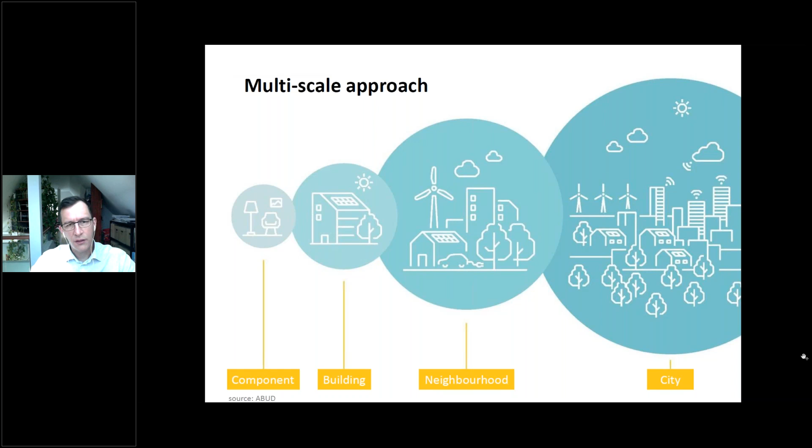Next slide, please. As architects, it's very important to understand that our actions are influencing all scales on the Earth. If we are working with buildings, of course, that will interact with the cities, but the smaller ones, the buildings or even the building components, are an important scale for us as architects. And today, next slide, please, we will focus much more on a very special and, for many architects, the most important issue: how our buildings look.

Talking about the whole envelope, I would like to concentrate mostly on one special issue, the thermal insulation and thermal transmittance of a specific facade. And I would like to address one very important issue, next slide, please, which is mostly the problem of overheating of our buildings. You know very well that in Europe we have regulations, the EPBD, related to the thermal performance of buildings. And of course, we have different specialized regulations regarding the building envelope.

Next slide, please. In general, we have addressed this issue for many decades, and we think that if we insulate our buildings more, then the result is increasing energy efficiency. However, I would like to share one case study with you where we studied how to optimize the building envelope. The next slide, please.

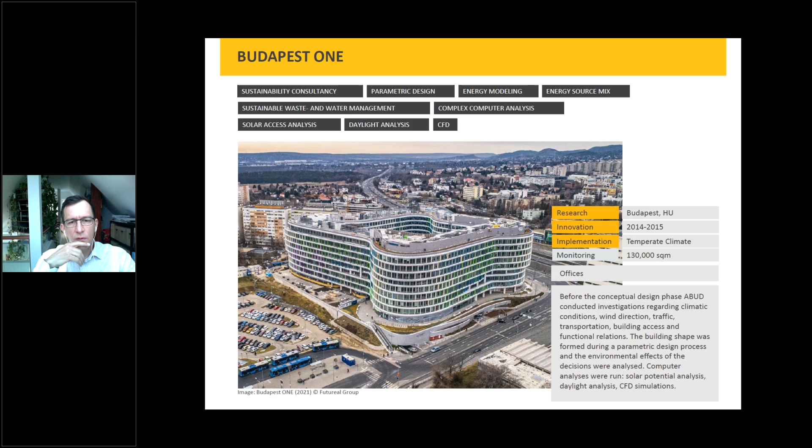Next slide. Of course we did a lot of simulations and modeling work to optimize the whole building envelope, the shape and everything around the building. We even did several CFD simulations to study the microclimate around the building. And because of those complex simulation works, next slide, please.

Because of those complex simulation and optimization work, we could decrease the primary energy demand of the buildings. However, looking more into detail, we see that the primary energy distribution is very much cooling related. So in office buildings, in climates like Budapest, it's actually a cooling related issue, and you can see that heating is more or less not so important.

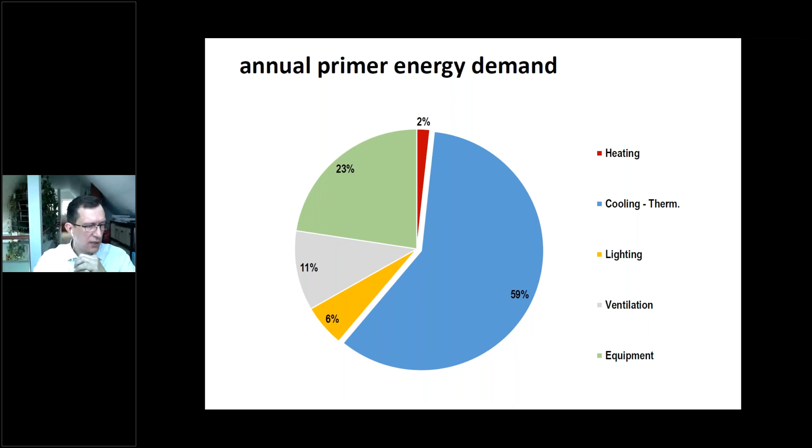We did several optimization processes, looking into climate change scenarios but also how the EPBD is going to become stronger and stronger, meaning you will insulate buildings more according to regulations. You see that this actually counteracts energy efficiency, because comparing a less insulated building with a much more insulated one, and also looking into climate change scenarios where boundary conditions will change and the microclimate will simply become hotter, you will have a much higher energy demand in the building.

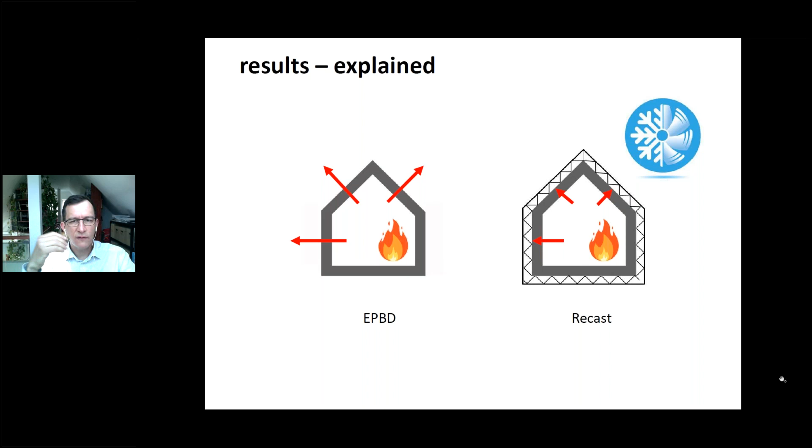Just to explain this: think about a normal conventional building envelope where we put more insulation on the building, and we put internal gains into the building. It will be much more complex for the heat to go out through the building envelope. And what will you need in this case? Of course, a kind of artificial system to cool down your building, which will result in a much higher energy demand in the building.

So I have to say that in many cases, especially in southern countries or in climates like Hungary, a continental climate, it's not only the U-value that counts. So we have to rethink very much, for example, the EPBD regulation. It's not really the recast we are aiming for, it's much more a rethink.

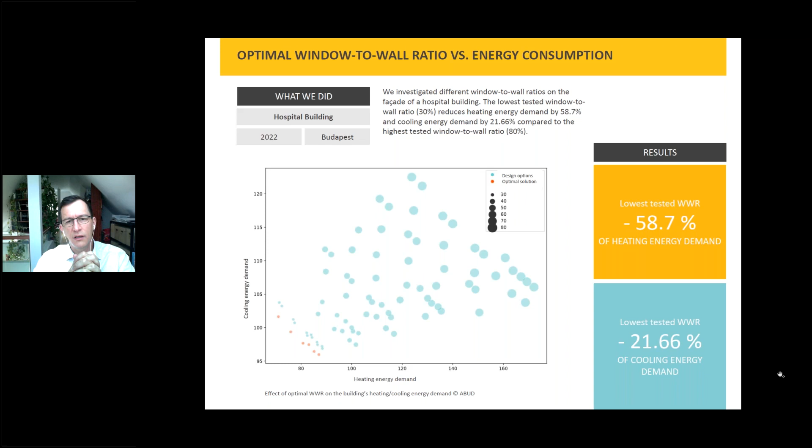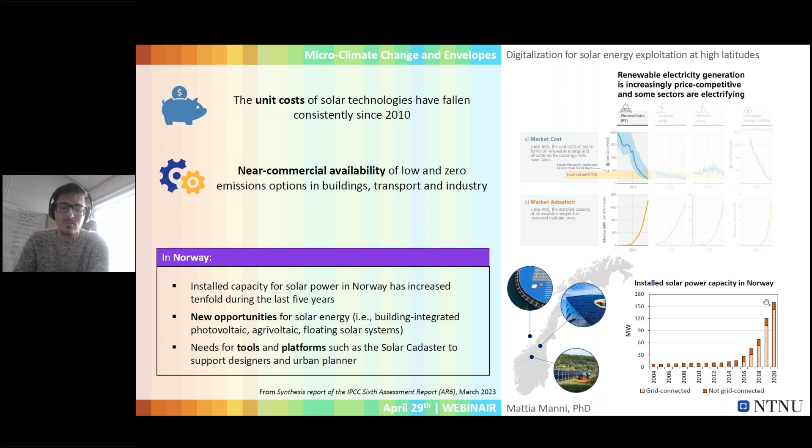Therefore, there is a need for tools and platforms that can provide support to designers and urban planners.

And here comes the sun, Helios, in this case. Helios is the project I'm working on. It's a project that aims at developing a solar cadastre for citizens, for the community. A solar cadastre is a 3D solar map that can be accessed by citizens to optimally exploit the solar energy potential of their buildings.

This project is built on 4 pillars. Pillar 1 and Pillar 2 concern the input parameters of the solar cadastre, which are the solar data sources and the geometry volume.

Activities within pillar 1 are focusing on the investigation of solar data sources, both numerical reanalysis and satellite observation, but also ground measurements. We established a ground monitoring network at the university campus, equipped with several pyranometers installed with different orientation and tilt angles. There is also a sun tracker that can provide measured quantities of direct and diffuse irradiance, which is not so common everywhere.

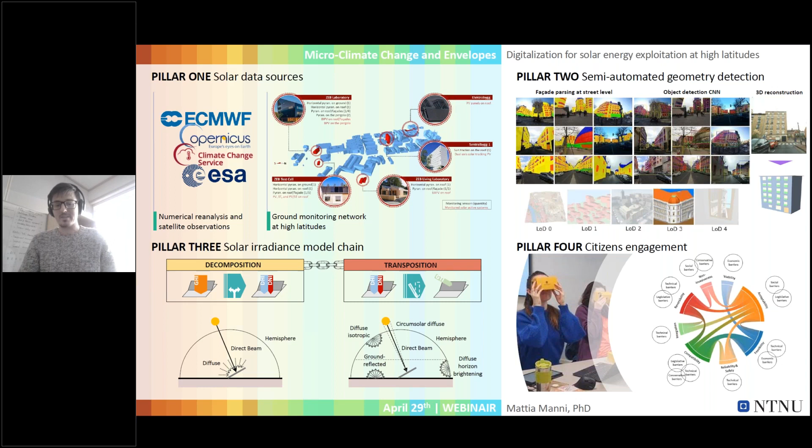This is a case that happens quite often here, and of course we get some loss in the energy production because of the snow accumulating on top of PVs.

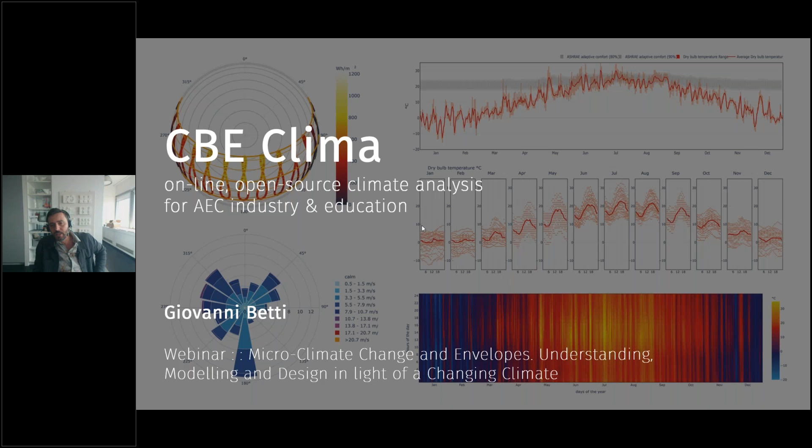Perfect, so hi everybody, my name is Giovanni Betti. I'm going to be talking quickly about a project that I've been working on for the past couple of years and still under development, called CBE Clima.

Just before that, a couple of words about me. I'm an architect, I am currently head of sustainability at Henn Architects in Berlin, and I'm also a guest professor for digital and experimental design at the University of the Arts here in Berlin.

A bit more about me: I started my career at Foster Partners, where I was in a team called Specialist Modelling Group for about 8 years, where I was associate partner. Then in practice here at Henn for about 5 years, leading a team called Performance-Based Design. Then a short 2 years in academia at UC Berkeley as assistant professor for architectural design for building performance. And now I'm splitting my time between practice at Henn, trying to set up and lead a sustainability department, pushing our buildings to be carbon neutral, and also at the University of the Arts here in Berlin.

The work that I'm presenting here is work that I started at Berkeley and continues - it's CBE Clima, an online open source climate analysis tool for the AEC industry, for the architecture, engineering and construction industry, but also for education in these fields.

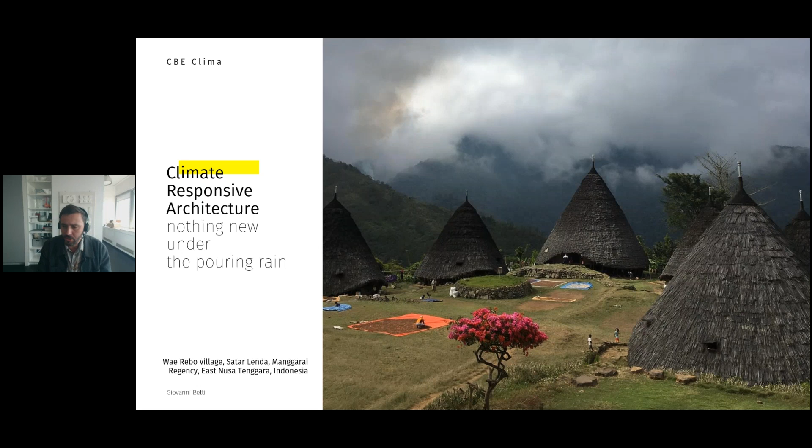And this starts from a basic consideration: climate responsive architecture is nothing new. We have a lot of very beautiful vernacular historic examples, from the wind towers of Yazd, to villages very well adapted to the wet and humid conditions in Indonesia, to beautiful city planning examples in North Africa.

And climate responsive architecture in the face of the climate crisis is arguably always more important. While climate responsive architecture is nothing new, climate analysis is actually a modern invention - probably modern with a capital M, in the sense that it relates really to the modern movement and to this sort of breaking point with tradition that came with industrialization and the modern movement.

So at the turn of the 20th century and after the war, there's really been a shift in how architects would deal with climate, treating it as a specialist subject. This led to developments in creating the science of microclimatology - how topography affects microclimate. There are a lot of beautiful, fascinating graphics that describe these actually quite intangible aspects and how they interact with the built environment.

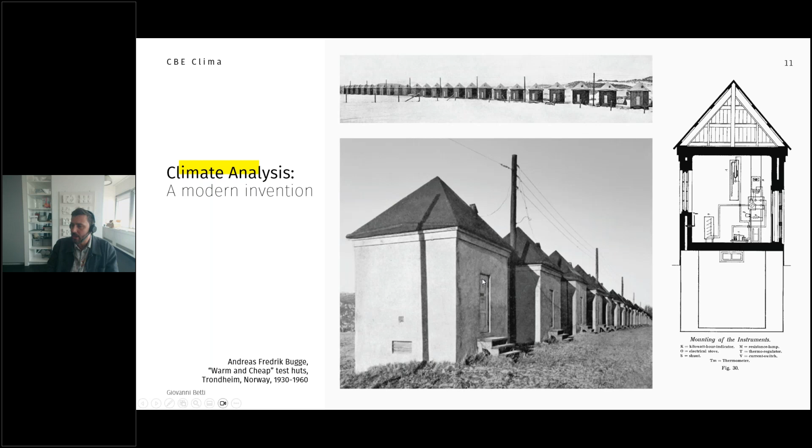I always find fascinating these Warm and Cheap test huts by Fredrik Bugge in Norway, trying to understand how different constructions respond to climate. And this is probably the first time modern climate analysis appears - in this American Institute of Architects regional bulletin in the 1950s, where they start publishing statistics of climate and how these could impact architectural design.

This brings us to our current situation, where unfortunately this activity, so fundamental to design, has become somehow a niche and time-consuming task. There are specialized programs that need to be downloaded - here Climate Consultant, which has a long history, or the state of the art which is also a chain of tools, so with Grasshopper, Ladybug, or Climate Studio, or whatever - but it's essentially a software within a software, so it gets quite specialized and technical and requires quite a lot of knowledge.

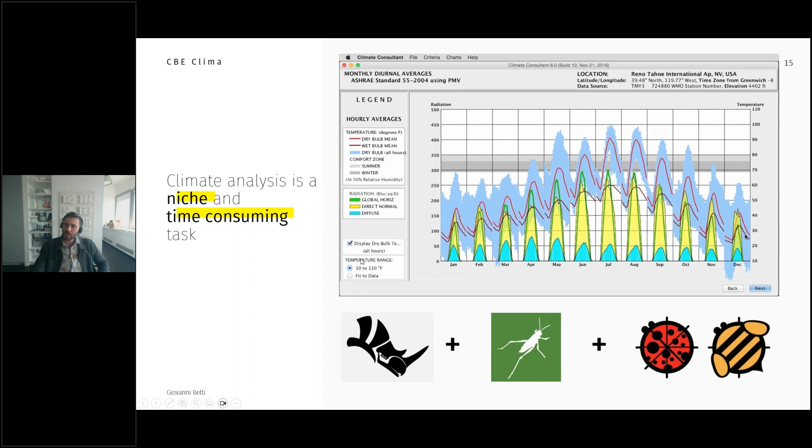And that was, for instance, also kind of the way I was doing this professionally in my work, building over time this monster definition, adding graphs and adding specs, and this was actually working relatively nicely. That monster definition that you saw there would then spit out a 40+ page climate report with all the graphics. But again, the problem is specialization, for something that should be such a basic activity.

So that's where Clima tool comes into place, and the goal in creating Clima tool was to create a tool that was easy to access, easy to use, easy to understand, and flexible. For those of you that are interested, it's mostly in Python, and we use pythermalcomfort as one of the main libraries specific to the psychrometrics, and PVlib, and we use Plotly for creating all the graphs.

And this, again, easy to use, easy to access. The code is under MIT license, which means you can take it and remix it and reuse it and do whatever you want with it. And all the graphics are under Creative Commons. Use them for any purpose, educational, research, and or professional.

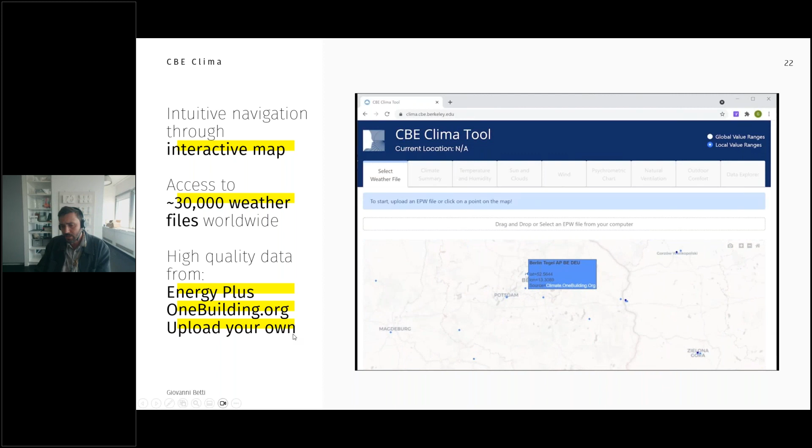Clima works like this, and maybe I'll switch. Let's see if I can switch to a live demo. Maybe somebody can make some noise that you see now a web browser.

But essentially it works quite simply as a series of tabs that you move from left to right. You start with a world map where you can zoom in and select the weather file you want. So now I'm in Berlin, so I'm gonna pick one in Berlin. And then essentially you move through the tabs left to right, but you can also jump in between. So we start with a climate summary where we give you back a map, so you're sure you picked the right place, and some basic statistics.

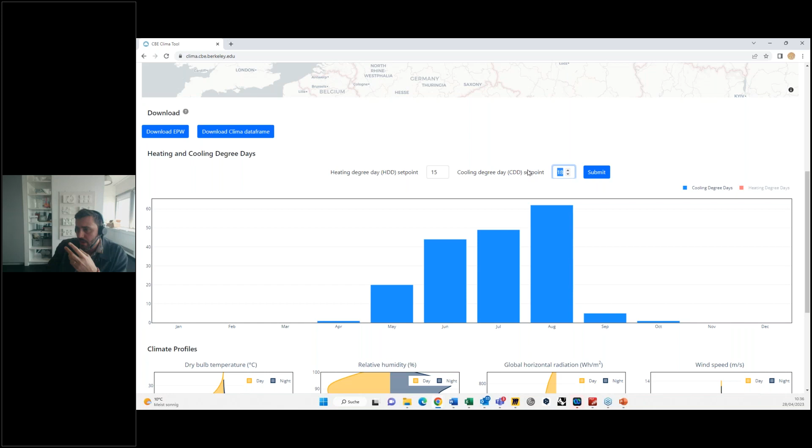You can download the EPW and you can download the climate data frame. We calculate a lot of other values on top of the EPW. And then you have basic stats like heating and cooling degree days as a basic starting point for the climate. And one thing that we wanted to do is that all of those graphs are highly interactive. So you have nice mouse over events, you can select, you can see only the heating degree days or only the cooling degree days. You can say, well, actually, I'm interested in 15 degrees as a base, not 10 and 18. And the graphs interact.

And then going into further levels of detail, temperature and humidity as the main variables, a yearly chart showing minimum and maximum overlaid with the adaptive comfort, monthly averages, and heat map charts. And again, everything is extremely interactive. So if you are interested only in certain months, you can zoom in there, and everything is downloadable as a vector graphic. You just click on this and you have it immediately as SVG, which means that you can put it in Illustrator if you want to process it, or just in your PowerPoint presentation, it can be printed at any resolution, can be edited, can be changed.

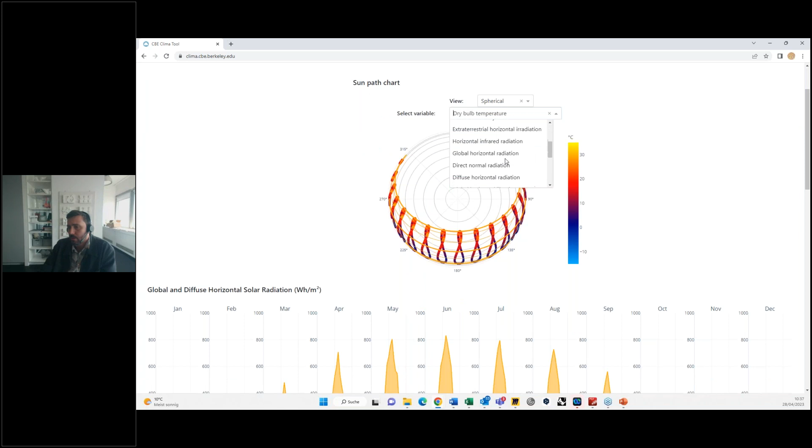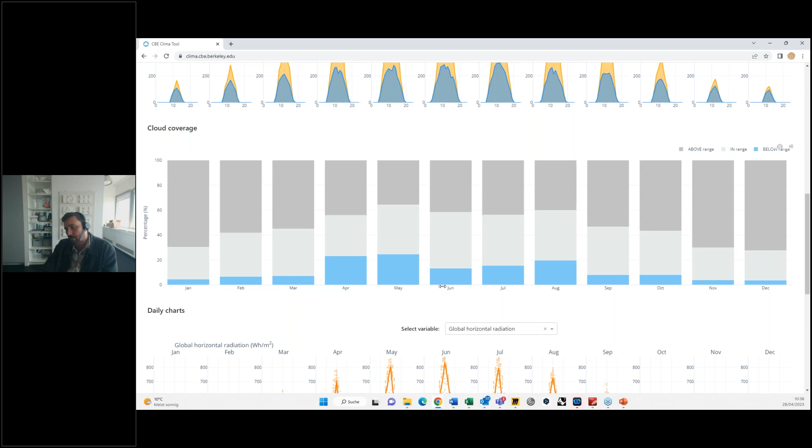And then again, increasing level of complexity, sun path. So we create the sun path. That's not in the EPW, but we have the information. You can overlay all the other variables that you have available, so dry bulb temperature, or if you want to know what is the radiation in relation to the sun path, or if you prefer a Cartesian to a spherical plot, you can do that as well. You can have diffuse and global horizontal solar radiation throughout the month as a plot throughout the day. A breakdown of how often it is cloudy, intermediate, or sunny sky in Berlin.

So with all this emphasis on climate, I clearly chose the wrong place to live, but that's another conversation.

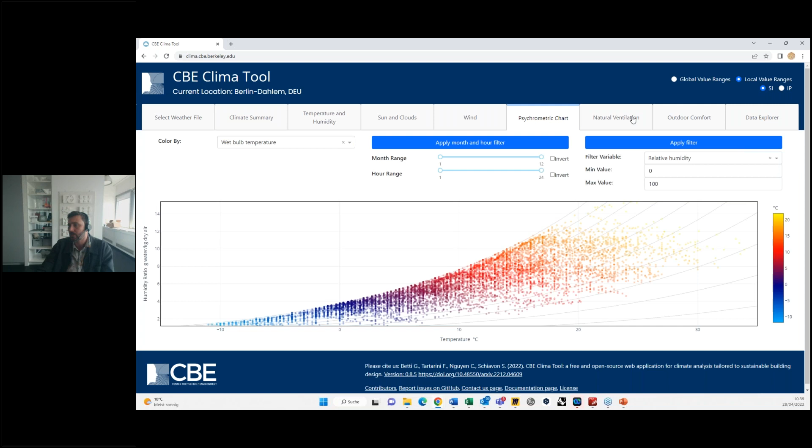And again, being able to drill down and moving forward, we can go look at, for instance, wind, where we provide you with wind roses. Here, for instance, if you're interested only in seeing the strongest winds, you can select only those and see what the wind rose is there. So this kind of idea of interactivity. And it keeps on going. It gets progressively more technical, if you wish, so a psychrometric chart where I can look at the frequency or I can plot data on top of that. We're also trying to get closer to design.

Am I running over time? Yeah. Okay. That's it. So I'll let you... Sorry. No, it's fine.

And I will just say, we do also a number of things.

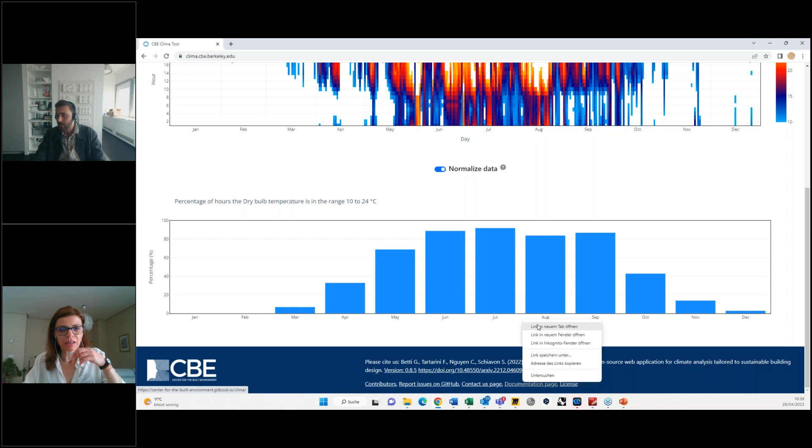So the only thing that I can say, we also offer here at the bottom of the page, you have a very rich documentation that explains everything that happens in the website in rich detail. So I will leave it to that, and we can talk more in the Q&A.

Discussion session. Okay. Thank you. Thank you very much, Giovanni. So we now leave the floor to Umberto Berardi, that is now with us. Hi, Umberto. Can you hear me? Good morning, Umberto. You have 8 minutes. The floor is yours. Yeah, I will be super fast. Don't worry. I was actually connected, but I was on a wrong link, whatever. Should I share my screen or do you share my screen? No, I'll share it for you. I'm going to give you the controls. One moment. It's okay.

So I selected a topic that is a bit bigger than the envelope, because what I want to describe is what we've been doing over the last few years in Toronto, Canada, where we've been creating an urban building energy model that really helped us to challenge the multiple changes that this city is experiencing. So next slide, because unfortunately you're sharing a PDF, but I'm more than happy to share the PowerPoint later on.

In brief, what is happening in the city of Toronto is that it used to be very low-rise construction, a very low-rise building typology, but on the river there are now basically 100 buildings with a height above 100 meters. So all this area in green has been subject over the last 15 years to significant development with a lot of new challenges.

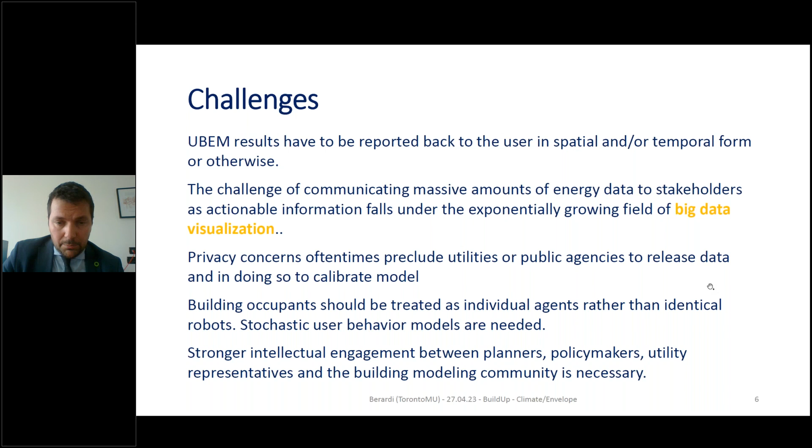Next slide. What we've been doing with these maps? Mainly trying to direct the planning of the city, making sure that we know what energy infrastructure needs to be put in place, and trying to promote a deeper penetration of renewable energy technology opportunities within the city. There are still some concerns with privacy and with the amount of data we are dealing with. The data clearly is a big part, but also the visualization and the capability to take advantage of the availability of data. More recently, we've been taking this map to look at resilience and climate change impacts on the city. If you go to the next slide, please.

What you're going to see is a snapshot of a very powerful tool that Canada has made available for all researchers, called Climate Data for a Resilient Canada. This is a web page of the Ministry of Environment of Canada. So this is basically a high resolution, detailed IPCC for Canada, with all the scenarios and the impacts that different measures are going to have on climate data in 10, 20, 30, 50 years from now. If you go to the next slide, you can get a sense of what I mean. You can zoom in and get the energy demand month by month. And if you start zooming in, you have a resolution of 50 kilometers by 50 kilometers.

So it's quite a good granularity that Canada has made available for us. So next slide: with this data, we've been trying to couple this metadata with a bit of microscale data, to try to use WRF to get from this nationwide data to something that is more granular for the different neighborhoods of Toronto.

If we go to the next slide, the idea has been actually to look at the impact once we go to Toronto. And the impact is quite dramatic. If you use the ASHRAE characterization, Toronto used to be in zone 6. These days it's in zone 5, but it's already more or less moving towards zone 4.

So what is happening is that this continental climate is experiencing significant challenges over summer heat waves and summer heat demands. Just to give you a sense, last year Toronto had heating degree days that were only double the cooling degree days of the city of Toronto, which is actually astonishing if you think about that.

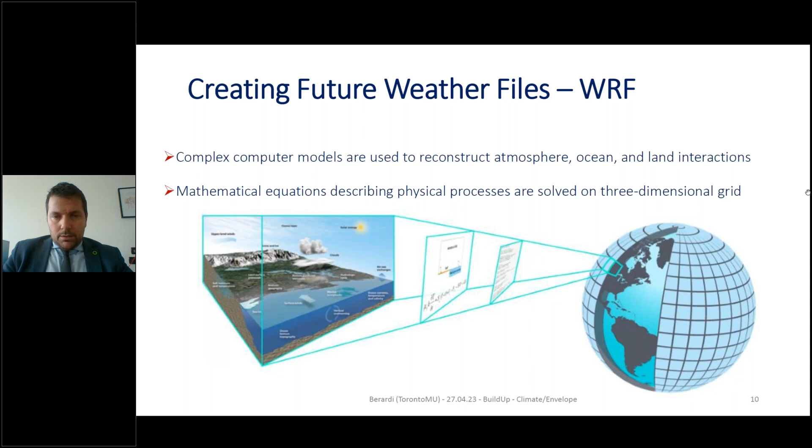So if you go to the next slide, clearly, if you go to our webpage, there is a significant number of studies that we've been doing with this kind of data. The idea has often been to compare different scenarios, to compare different options. Options in terms of intervention, in terms of penetration of renewables, in terms of decarbonization targets.

So with the availability of all these data, and more importantly, with these data applicable at the urban or microclimate scale, if you can get to the next slide, what we've been doing is a number of studies on the energy impacts of different things. So clearly, the availability of data creates the opportunity for doing a bit of planning. That needs to be automated with modeling that requires a bit more computing power, but that's available these days in most research centers. And with that, we can do different optimization targets.

So we go to the next slide, or even two slides from now, because basically I'm now just showing you a few pictures. So this is how the Toronto weather file will change. You can see the drop in the heating degree days from about 5,000, already in the range of 4,000, expected to drop significantly below 3,000. Next slide. So what we do is energy planning at the city scale. Here, for all the archetypes in the city, you see the energy demand shifting with different models to forecast the future weather.

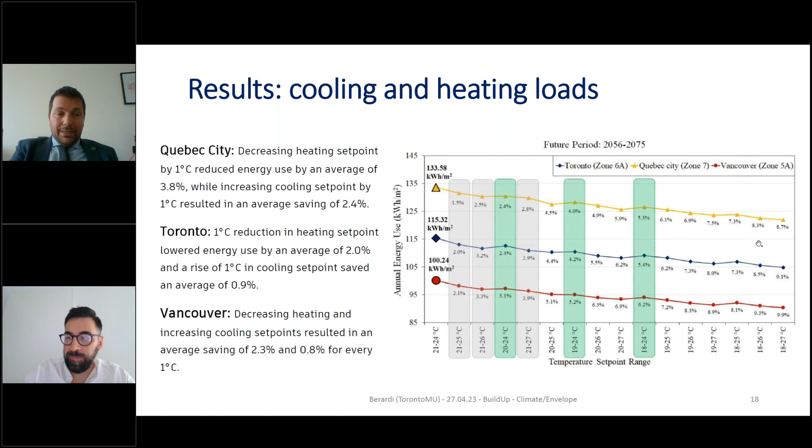So with that, I conclude. There are another couple of slides that simply look at an iteration of this approach, but I think the big picture is: cooling loads are clearly expected to increase, even in North America, heating degree days are significantly dropping, and being able to anticipate this trend when we do energy planning is really our key and, hopefully, valuable contribution to the community.

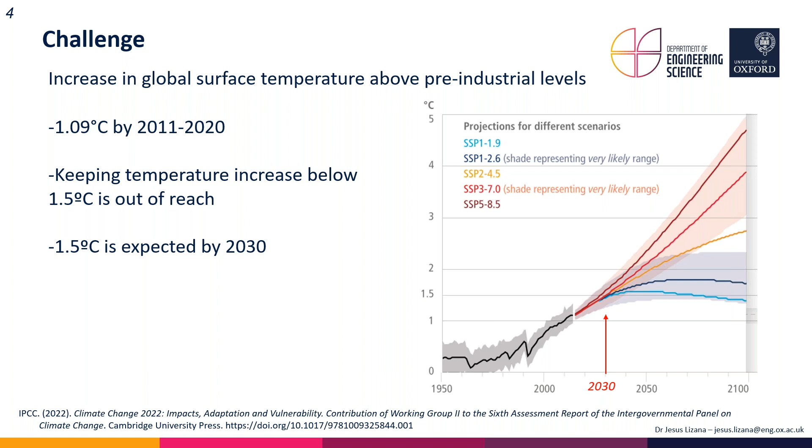This is really important, especially considering the last IPCC report, where we can see how the target of keeping the temperature increase below 1.5 degrees Celsius, agreed by the Paris Agreement, is out of reach. Climate change is here. In all possible pathways, we know that we are going above 1.5 in the next decade or sooner. So we need to somehow forget about the historical weather observations that we commonly use to support building design, and start designing buildings to be prepared for the coming climate hazards.

So this is the work that we are trying to create with citizens' data. We try to create more accurate climate information to support building design, in order to understand much better what the climate-related events are that our cities are going to face, and try to find the interrelationship between where we have higher exposure to these climate events in our cities and where we have the highest vulnerability, to support the creation of much better adaptation policies.

We are working with two main strategies. First one, working with citizen-driven distributed computing, and the second one with citizens' weather data. With the first one, what we try is to generate the highest spatio-temporal resolution climate modeling ever performed using the potential of the citizens' computer, in which we are able to share individual computational tasks into a large number of citizens' computers, in this case more than 30,000.

With this, we are able to get climate simulations globally of the different climate change scenarios at a very high resolution globally. However, one of the main problems of these global modelings is that they overlook the urban overheating. So the data to model the built environment at a very high resolution is quite challenging. So in order to understand much better the problem of the urban overheating, we are also looking at the citizens' weather data in order to get information at a very high resolution, how are the weather conditions inside the city.

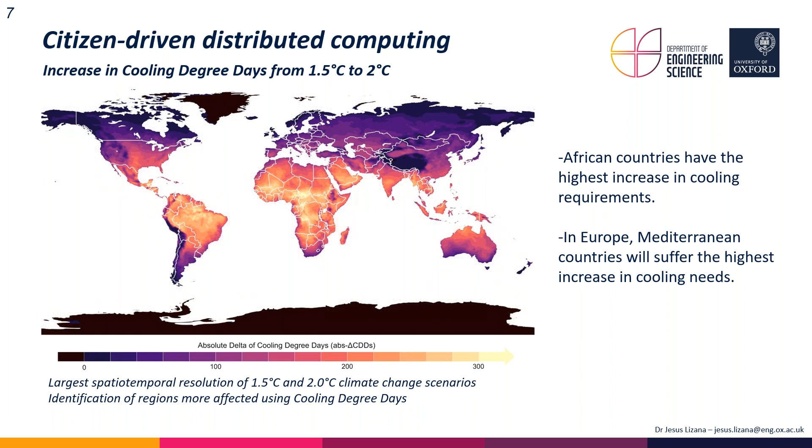Even in Europe, we can see how the countries that will suffer the highest increase in cooling needs are those located in the Mediterranean area, especially southern Spain, Italy, and even the coastal area from Greece to Croatia. So it's really important to start designing buildings, understanding the implication of climate change and how the weather conditions that our cities are going to face will change. However, as I said, one of the problems is that the increased heat exposure will be even higher in cities due to the problem of the urban overheating.

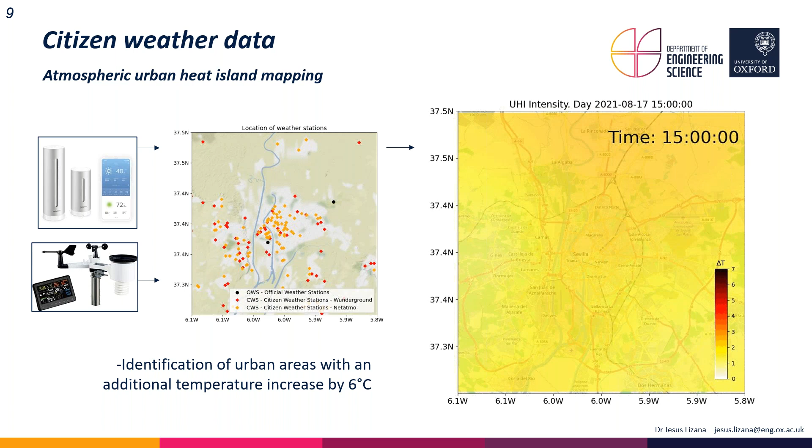So with this work, what we try to highlight is the important role of citizens' data to support the generation of accurate weather information globally at macro and meso scales, and at local and micro scales. The next steps that we would like to achieve in the following months are to disseminate, to close the different publications defining these approaches, to release the tools and the data generated in open access in order to support the decision-making process, in order to start designing and implementing better adaptation policies globally. This is the end of my presentation.

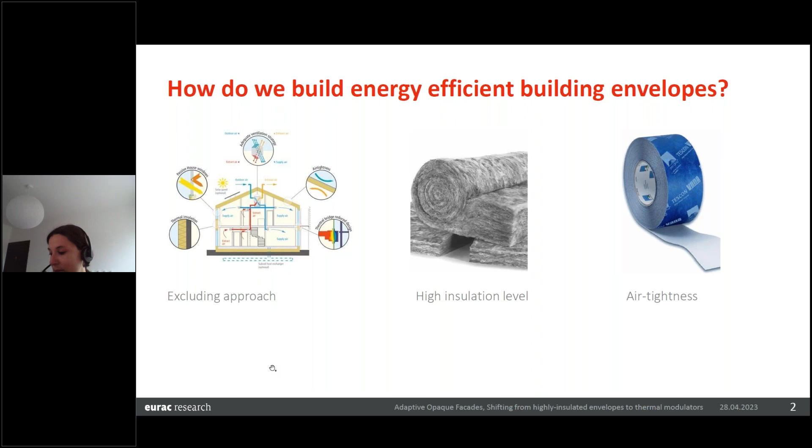This is something that Andreas has already presented in his first presentation, talking about how internal heat gains can create moments of overheating. This focus we've had just on the U value of our envelopes is also creating issues in certain climates, and we've been increasing the cooling energy need, even reducing heating demand, even in climates where historically this was not needed.

When proposing insulation levels, the norms consider average situations and specific weather files, which are a static picture, when neither the internal situations, internal heat gains, nor the climate are static. We're not just talking about what happens day to day or season to season, but as we know, the climate is changing, so the insulation levels we're putting in today might not be the best for future scenarios.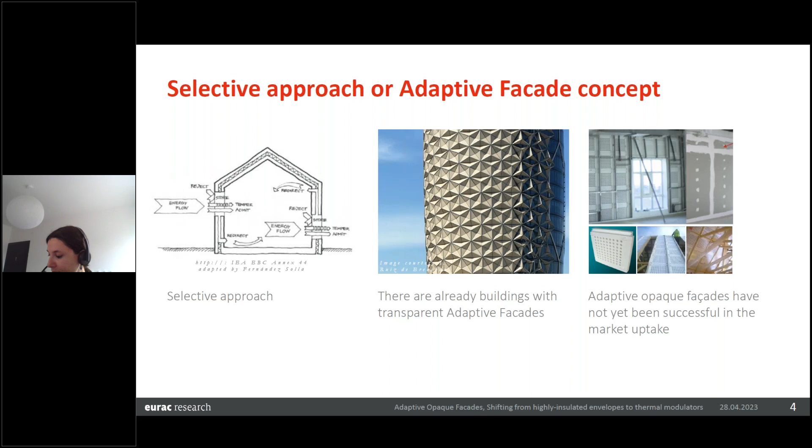I'll show you just a few examples of technology concepts that have been studied mostly in the research environment, that can help you understand how we could modulate heat through the opaque part of building envelopes.

One mechanism we can use is the pressure difference between the indoor and outdoor environment, achieved through the integration of forced ventilation via ventilators. This is used in concepts called parietodynamic walls and permeodynamic walls. In the first, we basically have a bypass in the insulation layer, so you can let airflow go from one environment to the other when we actuate the ventilator.

Instead, on the permeodynamic walls, you can let the air pass through due to this difference in pressure, thanks to the porosity of the material.

Another mechanism, slightly different, is the dynamic insulation prototype from the University of Colorado, using mechanical actuators. You see in white an insulation material like a Venetian blind—when the insulation material is in contact, it acts as a regular insulation layer; when it's in parallel, air flows and the insulation level drastically drops. These three concepts show us how we can go from highly insulated to low insulated building envelopes.

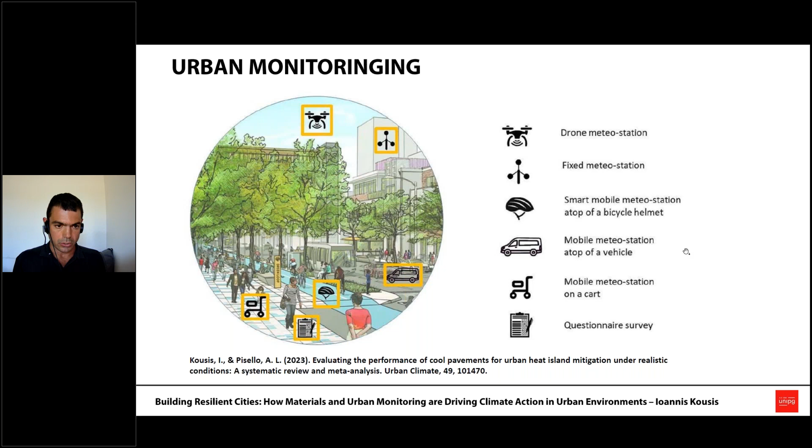So we have developed a series of relatively low-cost stations that can be applied within almost any urban area. They can monitor simultaneously urban environmental domains such as the thermal environment, air quality, noise, and lighting levels. Here you can see some examples of these stations.

These include monitoring stations that can be placed on top of cars, or lightweight sensors made with 3D printing that can be placed on top of bicycle helmets, backpacks, strollers, drones, and other similar carriers.

So what we do is go inside cities and perform various monitoring campaigns. We have developed and published several specific monitoring protocols for identifying ideal days of monitoring with respect to the local microclimate boundaries.

We have protocols for post-processing the data we collect and their consequent analysis process. So what we can obtain in the very end is a very good representation of the environment of the city with high granularity.

Essentially, we can locate hotspots of the investigated parameters, and together with the local authorities or decision makers, we propose mitigation solutions when necessary.

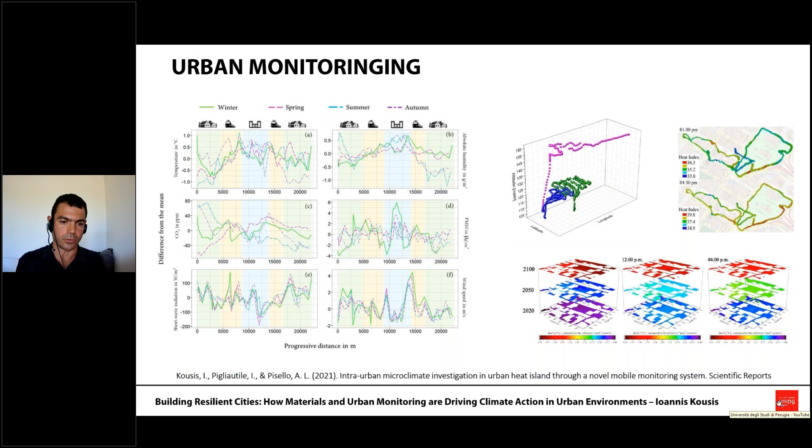However, we do not have the illusion that urban resiliency will be achieved just by monitoring urban parameters. The understanding we gain by experience should be coupled with active actions, such as the application of smart material-based solutions for the mitigation of various issues affecting cities' quality, one of them being urban overheating.

We know very well that mitigating urban overheating is almost a necessity for several cities around the world. Every year we experience ever higher urban surface and air temperatures that result in several heat stress incidences and serious issues related to health and well-being of citizens.

So until recently, several types of materials have been proposed that can reject heat and improve both indoor and outdoor environments. They can be placed on roofs, facades of buildings, or pavements, and decrease the surface temperature of these surfaces, or at the same time decrease the air temperature above them and therefore mitigate high urban air temperatures.

So typically the main asset of these solutions, also called cool materials, is the high reflectance of solar radiation. In simple words, it's like the reason we would choose to wear a white t-shirt instead of a black one on a sunny summer morning, because the lighter the color of the surface, the higher the solar reflectance, and the better we feel with a lower surface temperature.

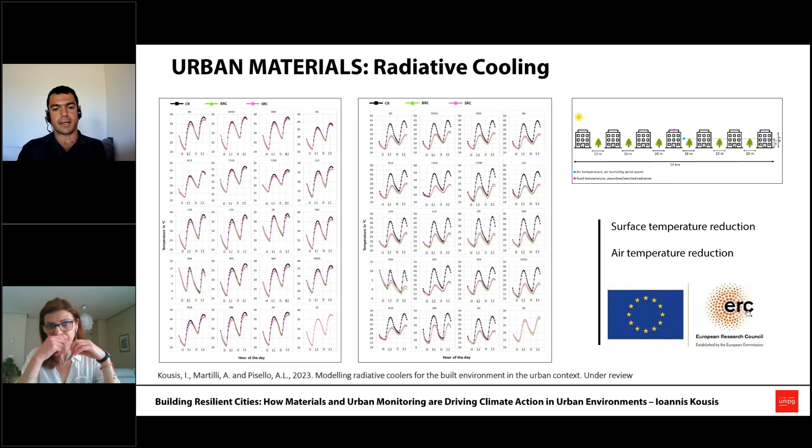So to conclude, some key messages: we believe in a detailed intra-urban evaluation of the urban environment by simultaneously monitoring interrelated domains. We believe that human-centered approaches are pivotal for engaging citizens. We have to understand the specific cities we choose to investigate with their specific microclimatic boundaries, and be smart, using smart materials like radiative cooling materials, which seem to be a very good promising opportunity.

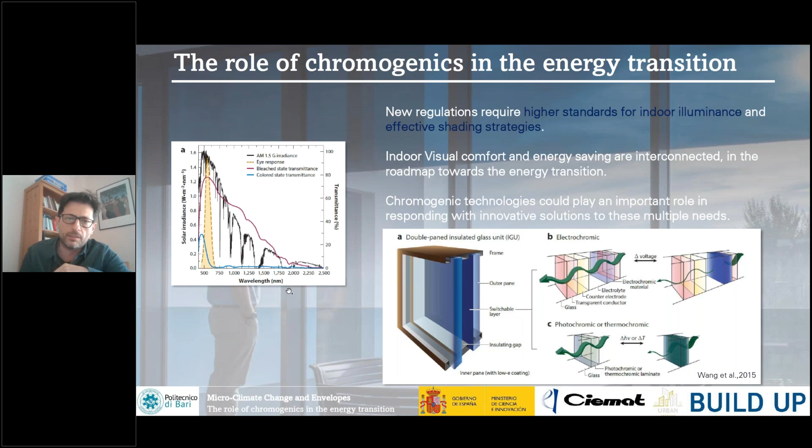So let me show you some recent results deriving from my personal commitment in the design of novel architectures for chromogenic devices, at least since 2009. These slides contain some data about a recent electrochromic device that I have designed, fabricated, and studied in the laboratories of CNR in Lecce and Politecnico di Bari.

And as you can see, we have a very simple architecture. The objective is to design low-cost electrochromic devices for smart windows. I have shared some figures of merit in terms of reflectance and transmittance. What I want to show you is that we have a solid-state device on a single substrate that can be glass or plastic, so flexible substrates, and we can obtain a fair modulation of about 35% of solar gain control, but also a surface that is fairly low emissive.

So these kind of devices can be used as a film with a thickness of lower than 10 microns, as you can see in this cross section taken with an SEM microscope, and can work effectively as a solar control and selective film on face 2 of glazing. These are some prototypes that I have fabricated.

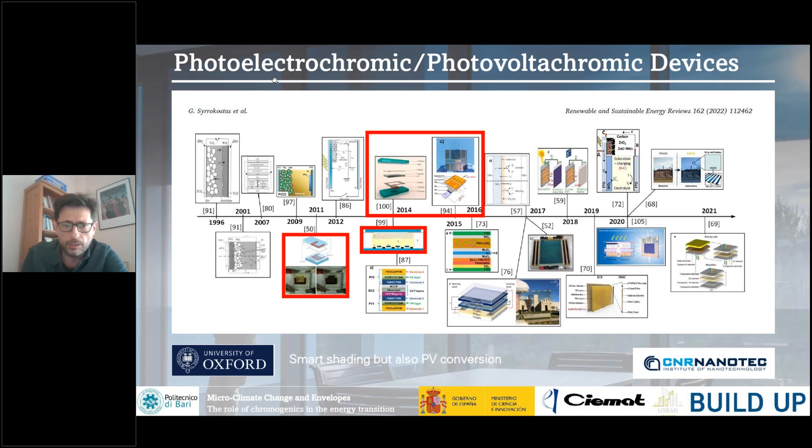Another interesting technology to increase the intrinsic adaptivity of transparent building envelopes is, of course, represented by photochromics. In collaboration with the University of Perugia, we have investigated the effect of building integration of spirooxazine-based photochromic materials in buildings using the EnergyPlus software platform, in order to obtain interesting feedback for chemists and materials engineers who design and produce such molecules, shifting from one isomer to the other, in order to obtain materials that have intrinsic intelligence, and to find out the way to reduce costs for building integration of these innovative technologies.

This molecule, even though it shows a very narrow band absorption spectrum, reported interesting results in terms of UDI and daylight glare probability reduction.

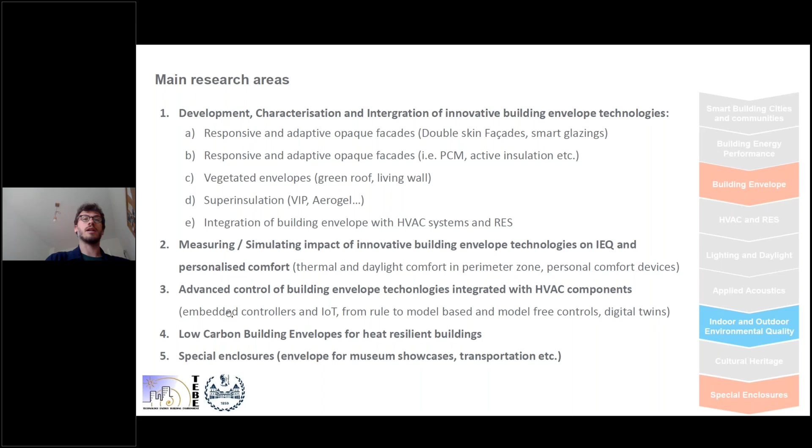dynamic elements. As you've seen from the past presentation of Alessandro, such dynamic technologies are able to manage solar radiation and other heat transfer mechanisms. So they rely really on a control system to do that. So we're very focused on designing this control system as well. And these are the examples that I'm bringing to you today.

To support both this simulation and experimental work, we have created over the years quite a large experimental setting, going from low technology readiness level, so material characterization scale in the lab, to different outdoor and indoor test facilities in which we test the performance of facade and building envelope components, and small labs supporting the creation of sensing and control devices. So what we are building now is really the level of demonstration of this technology in real life.

One of these test facilities, the one that I will present more in depth today, is the Twins test facility, so Testing Window Innovative Systems test facility, which we recently upgraded. We have two comparable non-calorimetric, absolutely passive cells, with a small baby of the Twins, where we can test different building envelopes on the south facades.

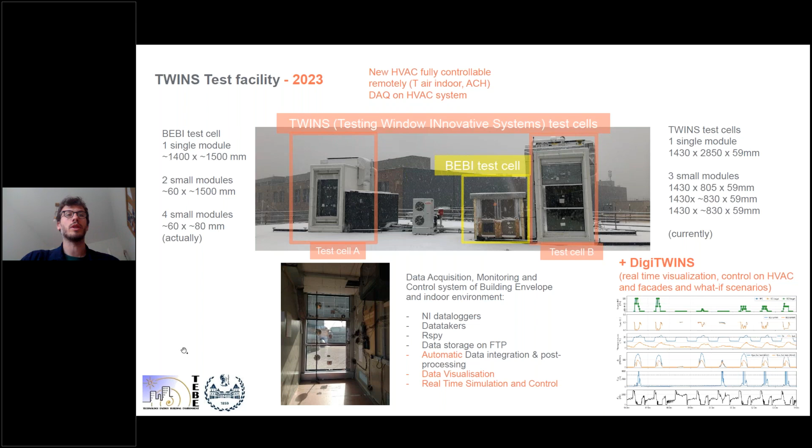But what we did, actually during the pandemic, is that we transferred all these physical environments to their digital twins, in which we are able to do real-time visualization of the data, but also real-time control of what's happening in the environment and in the facades that we are testing.

we are convinced, and we see the building envelope not just as a passive way to manage heat transfer with the aim of improving indoor environmental quality, but really as a heat and mass regulator of the indoor environment. And this is particularly important when we think about building a building today and operating it for maybe the next 60 years while our boundary conditions are actually changing. So we need to adapt also the way we manage that heat transfer and regulate the indoor environment.

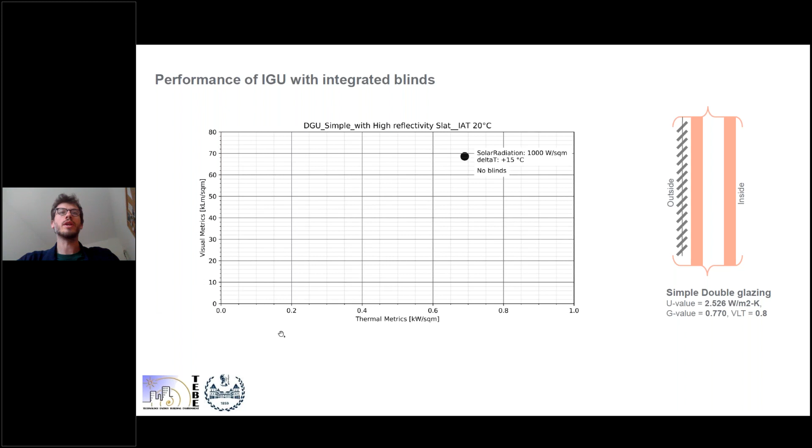The next slide introduces this concept on a typical transparent system. If we take, for example, a double glazing unit with an outer shading device, and we put on a graph the amount of heat flow going through the glazing, and on the y-axis the amount of daylight that can go through that surface in terms of illuminance, and we change the boundary conditions, we are able to manage both the total energy that goes through the system and the amount of daylight and how we impact the indoor environment. Here we changed, for example, in steps of 200 watts per square meter of solar irradiation on the outside, and a delta T of 5 degrees C for each step.

Now, if we instead also use ventilation in a cavity, so a double skin facade, we extended this concept in a project mainly sponsored by the Norwegian Research Council. It was done together with NTNU, Wicona, part of Hydro, us, and Aalto University. We tried to bring this concept to an extreme, to see how flexible we are in managing the overall heat flow and daylight across the facade.

In a double skin facade, we can do it by changing the ventilation mode, so whether we take air from the inside and bring it to the outside, or reversely, or we close everything in thermal buffer mode, or we take the air from the outside and bring it to the outside, or inside to inside, and the way we manage the internal blinds, and whether this ventilation is mechanically or naturally driven.

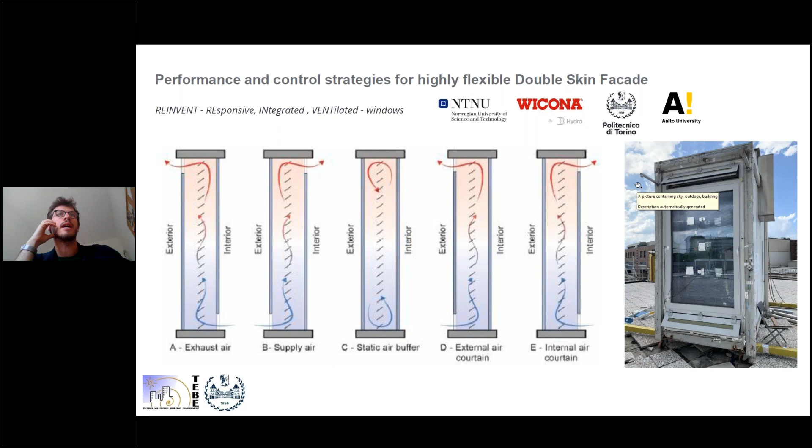Okay, so by redoing this exercise for a double skin facade that is highly flexible, so that it can achieve all these different ventilation modes naturally, mechanically, and also operating the blind, we can see that by changing the boundary conditions, so 200 watt per square meter radiation steps and 5 degrees C steps, we can see how much we are affecting the heat flow through the facades and the daylight through it.

So if we finally compare what we did before, so a double or a triple glazing unit, with the domain in which we are affecting heat transfer to a double skin facade in the different ventilation modes, you can see that with such a highly flexible facade, we are really able to use it as a heat and mass transfer regulator of the indoor environment compared to a triple glazing. And this depends really on the ventilation mode.

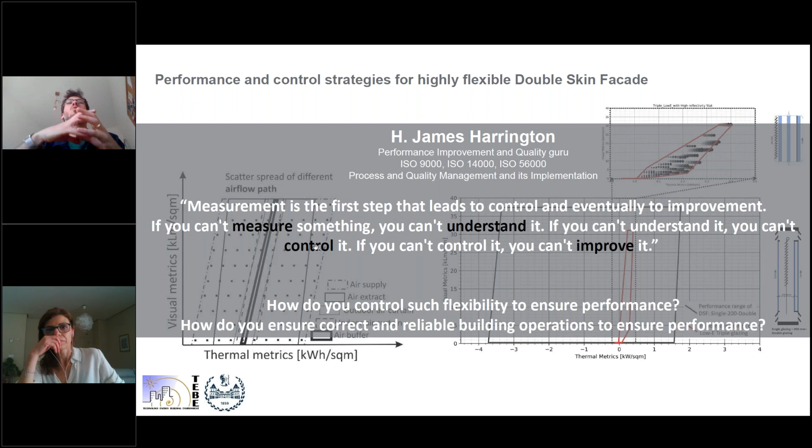So really the question is, how are we able to control such flexibility once we are able to achieve it? So what we did in the framework of a PhD program, we basically tried to understand how to control these 70 different configurations possible at each time step of the facade. First, to be able to model it correctly, and then by means of control, taking basically a control approach that's rather...

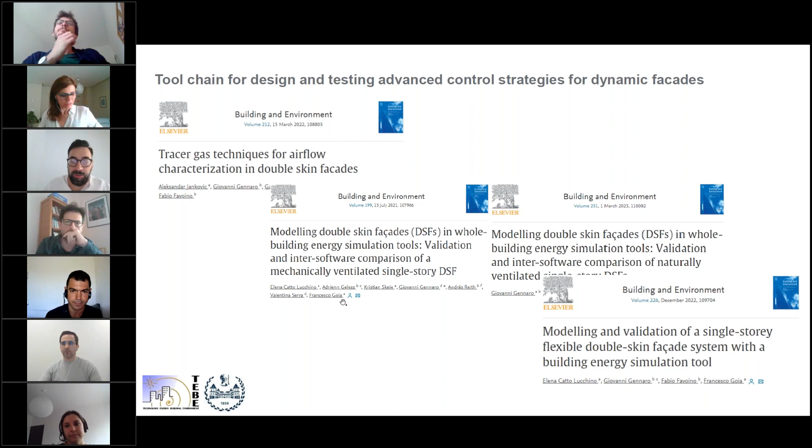Sorry, I'm not able to change slides. Yeah. Sorry. Okay. Fabio, sorry, I have to stop you. You have used your 10 minutes. So, okay, now we are ending this session. So I ask all the speakers to switch off the camera and we start the discussion and questions from the audience.

So it was a very interesting session, perhaps the most technical up to now. We had several data and several technologies. Also, in many cases, we have seen a very interesting digital twin. With Jesus, we emphasized the importance of collecting data and cross-referencing it according to the dynamics of climate change. That's a super interesting type of research.

Then with Miran, we had the chance to think of the next generation of opaque envelopes. Very critical will be to understand how these opaque envelopes that are static by nature will adapt to climate change. Following, we had a very interesting set of site technology for measurements by Ioannis, who also integrated very interesting diagrams on how material characterization, reflectivity and emissivity should be played locally and according to wavelength. So probably we will have a few questions on that also.

Thanks, Alessandro Cannavale, for sharing your insights and how your work fits into the history of how dynamic material evolves. I will have a question later on what's the next stage in this timeline. And finally, we had a super interesting contribution from Fabio that shows some examples and also the brilliant facilities at the Polytechnic of Torino.

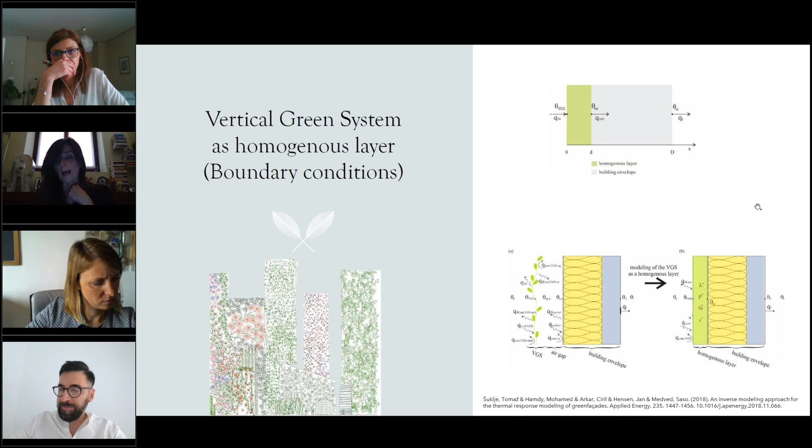So you can see on the left the vertical green system, the air gap, and after that the building envelope. This is a complex system, but on the right we can consider it as a homogeneous layer, and so the vertical green system can be defined as a boundary condition for our building.

Starting from these issues, we developed the green facade optimization methodology that studies the efficient conditions for the green wall facade, and we decided to study it using parametric optimization, starting from the weather data and moving through Ladybug, EnergyPlus and the Grasshopper plugin to optimize the green facade with Galapagos.

What we found is that efficient insulation is up to 9 centimeters, because more insulation becomes redundant and inefficient, since the green facade, as you can see, has the same thermal behavior regardless of the boundary condition and the external condition. We studied the Mediterranean area, and so a specific climate condition.

Another aspect is parametric optimization, and so we decided to emphasize the link between comfort conditions in the outdoor environment and the efficiency of the building. I don't want to bore you, but we defined a lot of correlations between all the meteorological variables and the thermodynamic variables, and with energy consumption and comfort expressed by predicted mean vote or UTCI.

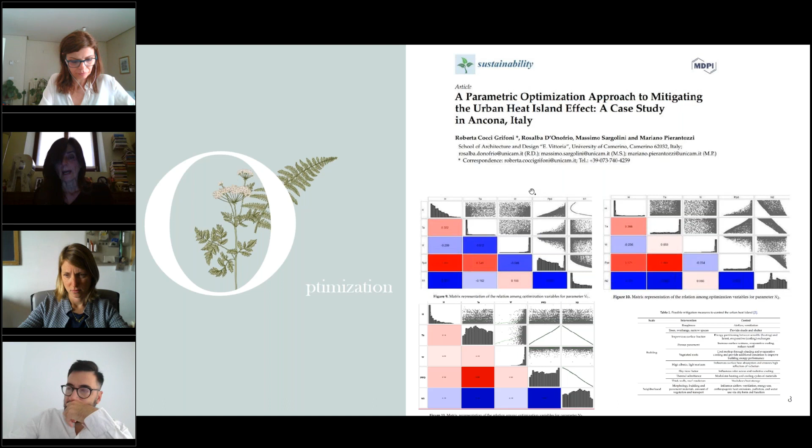And what we found is defining 3 indexes: the capacity of the building, the second one related to the energy consumption, and the third one to the building energy loss of the solar energy.

And using a parametric simulation with a genetic algorithm called NSGA-II, and using a model frontier that we have stolen from financial assessment, we found that temperature can be considered the leader variable, and that for temperatures greater than 33 Celsius degrees for some indicators, or up to 28 Celsius degrees, we don't have a solution. So we cannot reach good energy efficiency and also outdoor comfort.

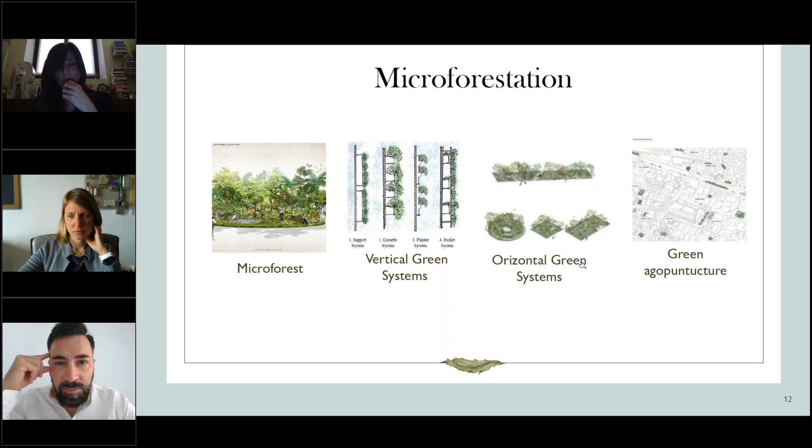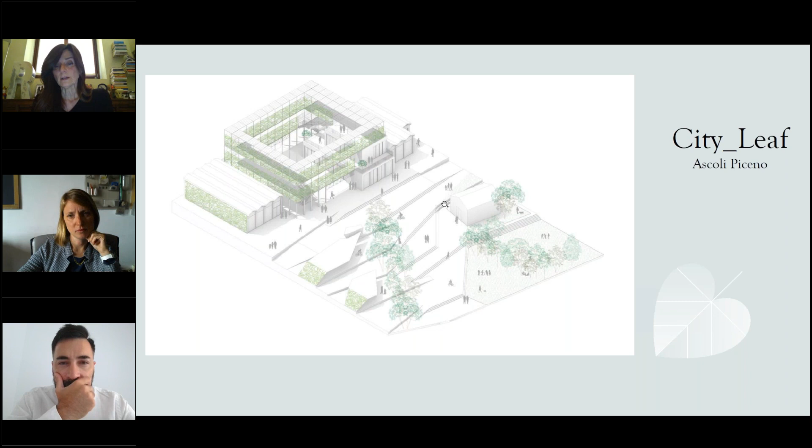And some examples from the city where I live, which can be considered a case study for a lot of our research, are, for example, the City Leaf project, where we consider a lot of green devices and wall green devices to enhance outdoor comfort. As you can see, we have an improvement of the comfort, but also in air quality and natural ventilation. And this can be reached using the green system and environmental conditions with great attention.

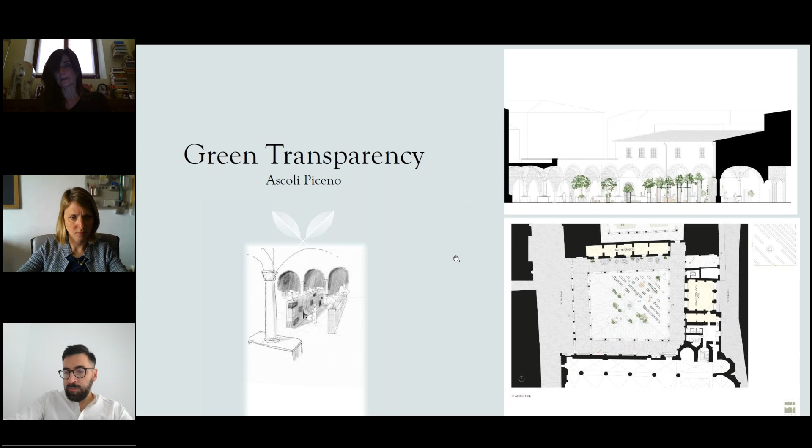The second one is the green transparencies. This is a project in a courtyard, typical in Ascoli Piceno, as well as in the little inland medieval cities. And we consider a sequence of modules that invade the courtyard and can be considered the boundary layer, slicing the spaces.

And these are the results. You can see that we have an improvement in the comfort. This is the map of the UTCI, ante-operam and post-operam, on the left and on the right respectively. And in this section, I think you can see the value of this project: the lowering of the temperature and the improvement of the UTCI, and so the comfort perception.

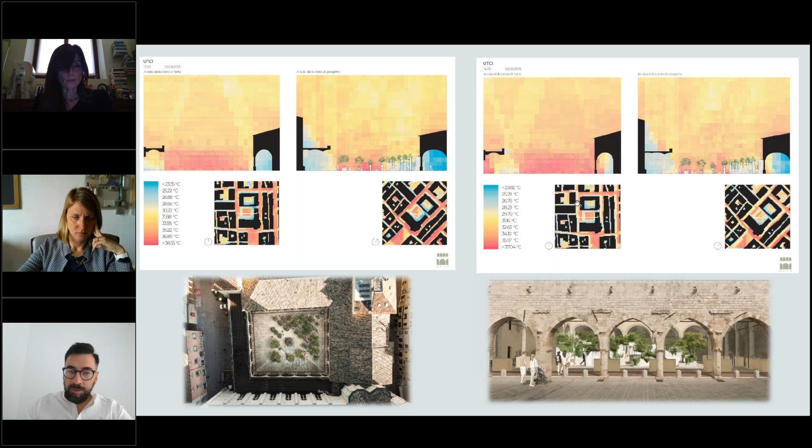So in conclusion, these issues were the basis for European and national research programs. We are working on two LIFE projects, on the coast LIFE AgriNet and in the inland area LIFE Imagine, some Erasmus Plus, Click and Eduscape, and some regional and national research such as PNR Research and Innovation, Vitality and PINQUA.

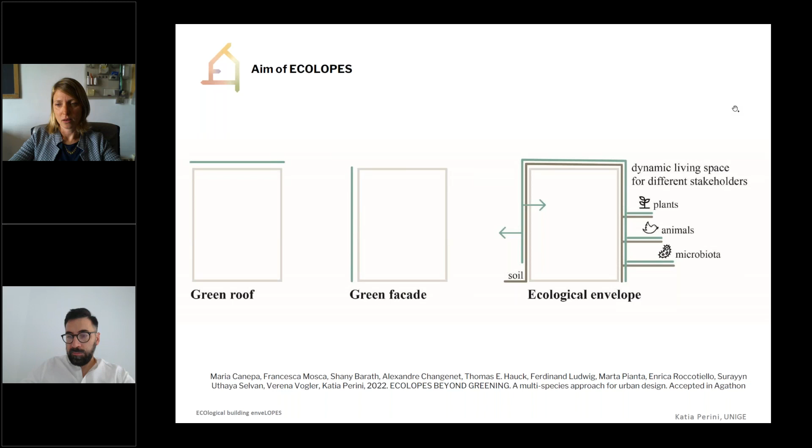ECOLOPES is a highly interdisciplinary project. We have scientists, and not only, also companies, from physical science and engineering, life science, and social sciences and humanities, and also, as I was mentioning, 2 different companies. So we have TU Vienna, we have Technion from Israel, University of Genova, which is us. We have McNeel, which is in charge of the software development and system architecture development. We have Studio Animal-Aided Design and the Technical University of Munich, which is also the lead partner of this project.

Okay, so this diagram is a bit complex to be just seen in 1 or 2 minutes, but I will try to explain what we aim to explain with this diagram. So it shows abiotic and biotic components which are considered in the design process, where humans, plants, animals and microbiota act as inhabitants. And it shows also the set of dynamic impacts and relations among them.

So animals, for example, with impacts on human well-being, seed dispersal, pollination, nutrient input, and also on microbial dispersal. The relations among the inhabitants can change over time, depending on the building material and the design, depending also on abiotic conditions and on the dynamics of biotic components and the degree of connectivity between the building and the surrounding environment, and also the type and level of human intervention.

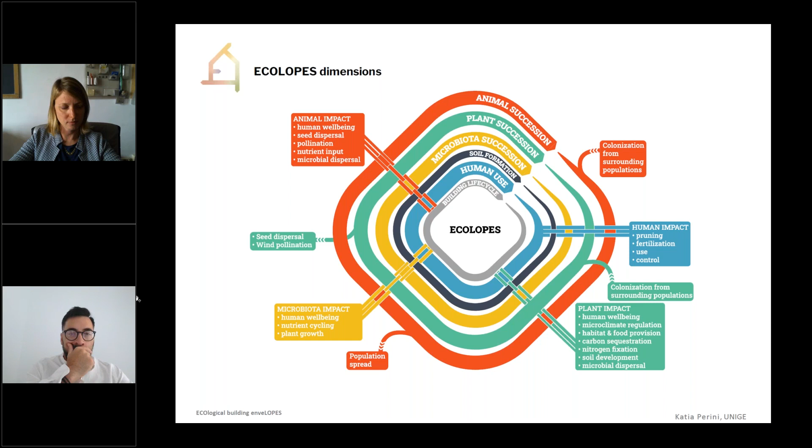They represent the needs of the non-human stakeholders or inhabitants, along with the human stakeholder represented by the client. Architects will define objectives and draft possible design proposals or sketches for a design process based on iteration. Expert contribution is fundamental because they use models and simulations to suggest design solutions and provide feedback.

The expert databases are the ones that we generate within the project. We're now generating a huge amount of data to create this database. This data will feed the ecological model, which is created by ECOLOPES information model ontology, collecting also 3D voxel data.

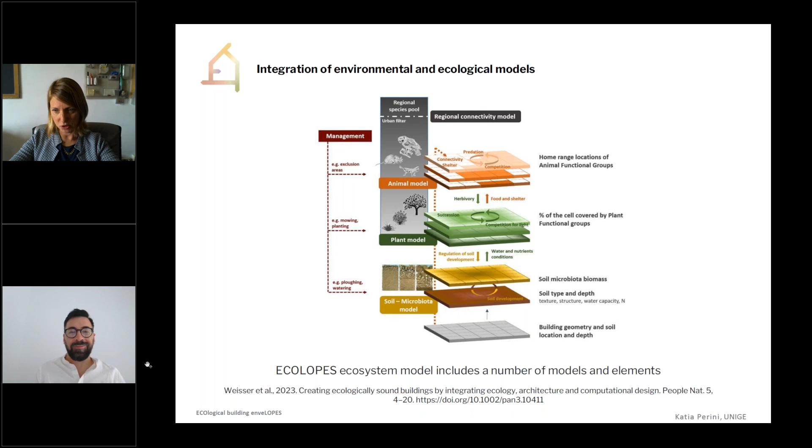We use the EPW file as input, and as output we get a TXT file, which is used by the local ecological model to evaluate, according to the outputs, which plants, animals, and microbiota species will likely reach the ECOLOPES. This integration is very important for the project, and is related to the building geometry.

We are now in the second year of the project, and we are identifying the methodology to analyze the trade-offs and synergies among the inhabitants, and to validate the design process and design outcomes. This is the challenge we are actually facing right now.

We will then use our design platform to produce some design outcomes, which will afterwards be validated and assessed according to indicators of success for the real-world realization of buildings designed using our algorithms.

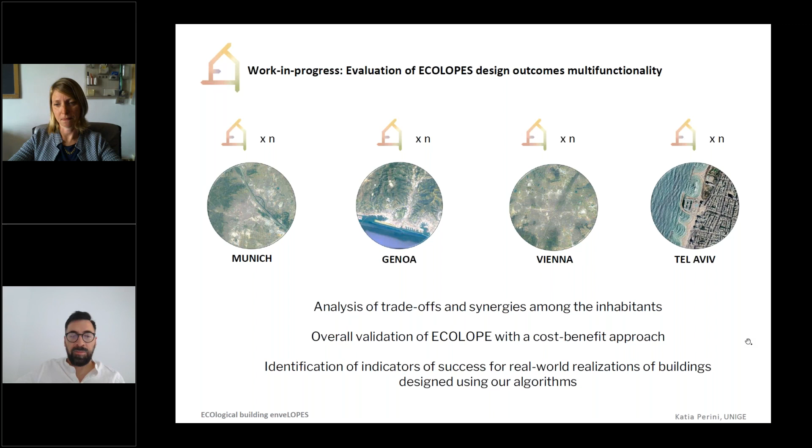Yes, perfect in time. So the last speaker of this session is Maria Beatrice Andreucci. Are you there? Nice, thank you very much. Thanks a lot, Emanuele and Emanuele. Great to be here with you today. Welcome, so thanks for joining. Thank you, thanks a lot.

So I want to see whether I can change the slide. No? Okay, yeah, yes, no, yes. Apologies. Thank you.

With the steadily increasing world population and economic development, human pressure on freshwater resources is increasing, as is human exposure to weather-related extremes, droughts, storms, and floods caused by climate change. But it's not only the hydrosphere that has impacted us, as vice versa, it is likely that human activities have influenced the global water cycles since the mid-20th century.

The demand for water is expected to increase by 55% by 2050, which will lead to a rise in water pollution, aggravating problems associated with water scarcity, since water availability is compromised by its quality.

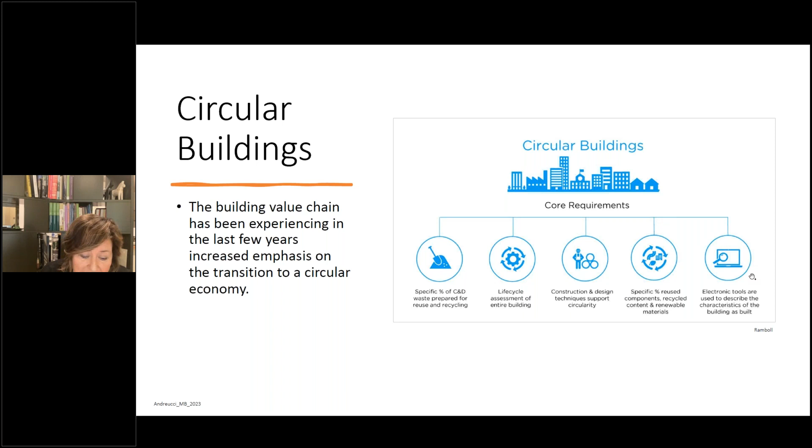Within the concept of circularity also lies a high-level material reuse strategy with several actions that are already commonplace today. Nature-based solutions as green technologies that can be implemented in combination with existing infrastructure or as standalone systems can support the transition toward the new water reuse paradigm by integrating circular economy principles into urban water management. The built environment can be identified as a key facilitator to address, promote, and benefit from a change in the water use paradigm by using urban circularity challenges to shift towards circular management of resources.

At the building system level, water streams, including separated wastewater, precipitation, and runoff, can be reused on site using nature-based solutions such as vertical greening systems and green roofs that can be integrated in the building envelope in new and existing buildings in order to address urban circularity challenges.

Plant water needs must be met throughout the year to allow for the full spectrum of multifunctionality that includes increasing biodiversity, contributing toward public health, decreasing air pollution, biophilia, and cooling the surrounding area. This demand is mainly met with fresh water or drinking water, further contributing to water depletion.

Moreover, the production chains of components for vertical green systems and green roofs not only consume water, but the production of this water requires energy for pumping and also for treatment, meaning carbon emissions are associated with constructed systems such as these, which are conceived as nature-based solutions, where the express intent is often to reduce a building's environmental footprint.

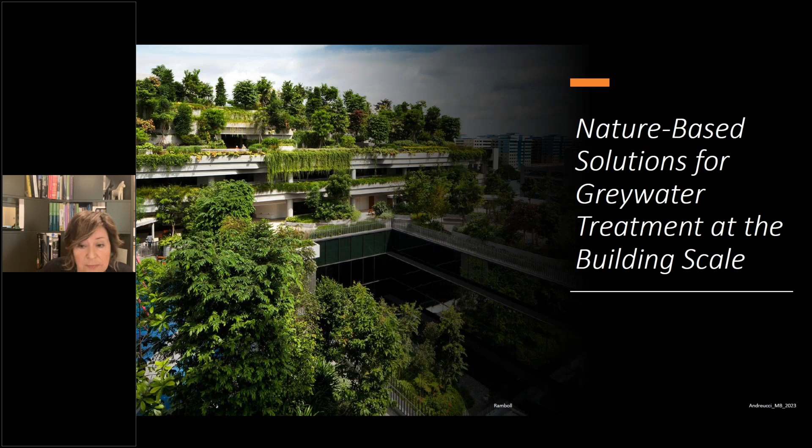In a recent study we conducted within the Circular City COST Action, the contribution of green multifunctional envelopes was explored. As the actual water demand of plants is highly dependent on various geographical, climatic, and physiological factors, a case study was used as a methodological approach to simulate the potential for meeting water demand with rainwater and grey water availability in model buildings located in a cross-section of European cities, in Turkey, and in Israel.

The aim of this simulation case study was to assess the potential contribution of vertical greening systems in an urban context to the management and recirculation of water, preferably rainwater runoff, but also grey water at the building scale.

The evapotranspiration performance of vertical greening systems in Copenhagen, Berlin, Lisbon, Rome, Istanbul, and Tel Aviv, cities with different climatic, architectural, and sociocultural contexts, have been simulated, adapting and simplifying a well-established methodology developed by the FAO, assessing rainwater runoff and grey water as irrigation resources.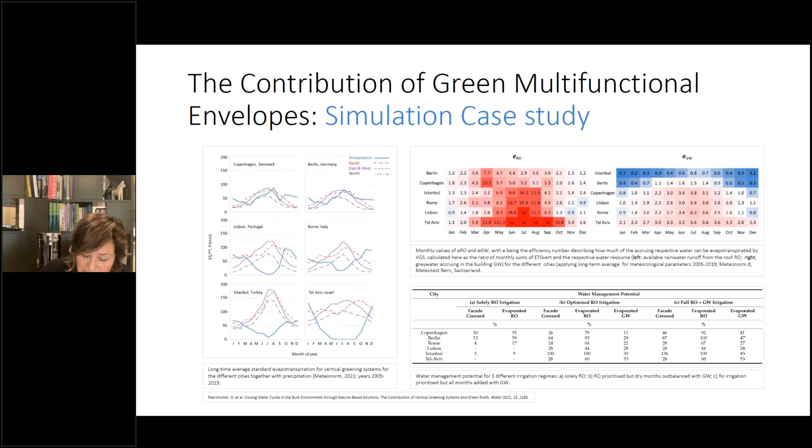The climatic conditions, in particular solar radiation as the basic driver, shape the overall water management potential in each city. However, the examples show that architecture can at least partially overrule the climatic condition, as it determines the greenable area, and the ratio of facade area to ground area strongly influences both runoff and evapotranspiration.

Several issues could also arise from implementing green roofs and vertical greening systems in existing buildings, such as structural issues, efficient performance, and end-of-lifetime disposal. Regarding structural issues, most buildings have load restrictions, especially roofs that were not intentionally constructed to accommodate nature-based solutions. Of course, the knowledge required to avoid structural problems already exists and should be implemented.

Regarding ecosystem disservices, compared to the provision of ecosystem services, research on ecosystem disservices - those ecosystem outputs that diminish human well-being caused by nature-based solutions - is relatively scarce. Open questions include, but are not limited to, fire resistance in vertical green systems, the quality of runoff water from green roofs, and air quality effects.

Regarding future-proof nature-based solutions, critically, the long-term functioning of such solutions is seldom addressed, and one way to do so is to quantify how each solution responds to stress induced by water deficit, heat waves, and extreme weather phenomena. However, there is little empirical evidence of this, which limits mainstreaming and replication, mostly because climate change is an ongoing nonlinear process, and there has been limited exposure of nature-based solutions to it.

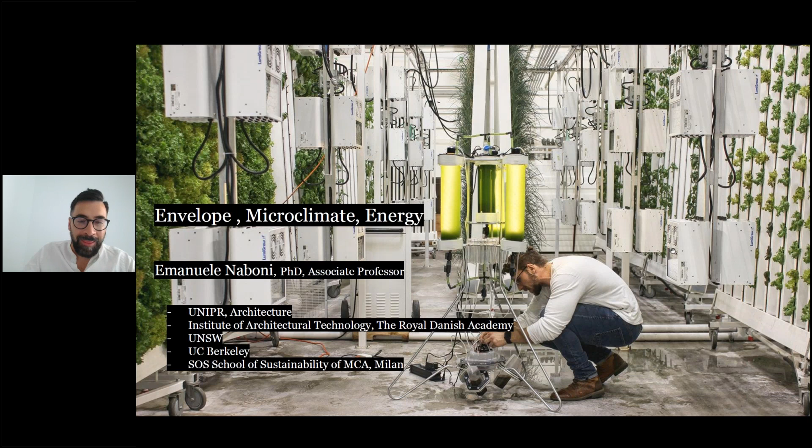Yes, so for those that just connected, my name is Emanuele. I'm a professor of technology and architecture, currently working for a few entities that are listed here in the presentation. At the moment I'm collaborating primarily with UNSW in Australia, working with Professor Santamouris.

I'm also working in the University of Berkeley with Professor Stefano Schiavon, and keeping my endeavors at the Royal Danish Academy, where I've dismissed some activity, but I continue to be involved in the Master of Architecture and Extreme Environment. I collaborate also with the School of Sustainability of Mario Cucinella and with University of Parma.

We have several collaborations ongoing, half of which relate to master plans, consultancy, sustainable buildings type of construction, and also ongoing research primarily related to how architecture and urban planning should answer to the threat of climate change. And linking to the past session, my idea was to show some cases, beginning from those that relate to living systems.

Primarily working with Mario Cucinella for creating the bed for future development within the Italian context, we try to understand how climate will change. This for a set of reasons. Some are related to decarbonization, create buildings that use less energy, and allow the creation of positive energy type of district. These are projects that are actually ongoing in the center of Italy primarily.

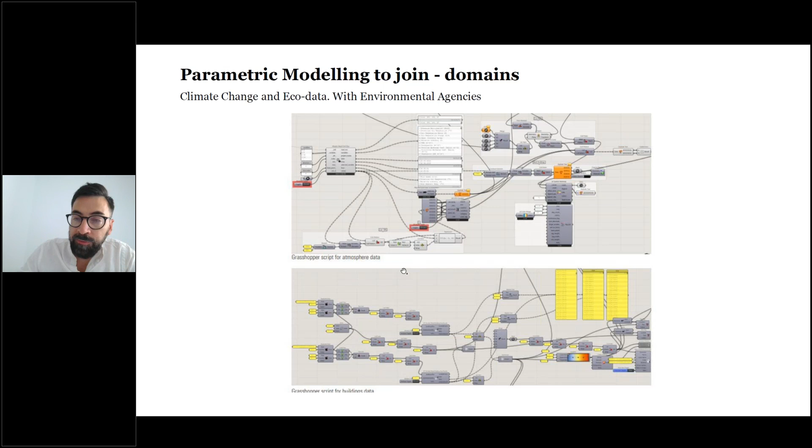What we did is to create Grasshopper scripts, which are linked to historical data and variability of different types of data that come from environmental agencies. We put some emphasis in understanding how, for instance, the ecological status of water bodies may change, as well as how hydraulic flows, you can follow this line, are going to be reduced by climatic happenings.

Furthermore, we inputted the equation of correlation between temperatures and pollen concentration. So we can see how this is declining, and we know how this is very important because they are at the basis of several systems, both the food chain as well as biodiversity. We can see also how certain types of species will be declining, as well as the pollinating insects, which already, according to historical data, were declining.

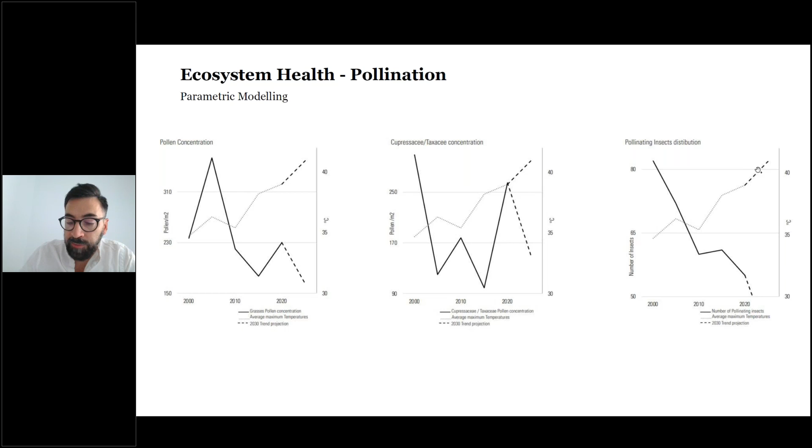So the first outlook of this workshop that perhaps can link to this project is that although this conference has had an emphasis on, let's say, the classic domains of what we can call today sustainable design, or for some of you urban sustainable design, or for others the technical physics related to that, a first output that came out from the first session is that we need to think multidisciplinary, involve much more and coordinate our data, let's say in a mathematical way, in order to have outcomes that can, in a more holistic way, consider several implications.

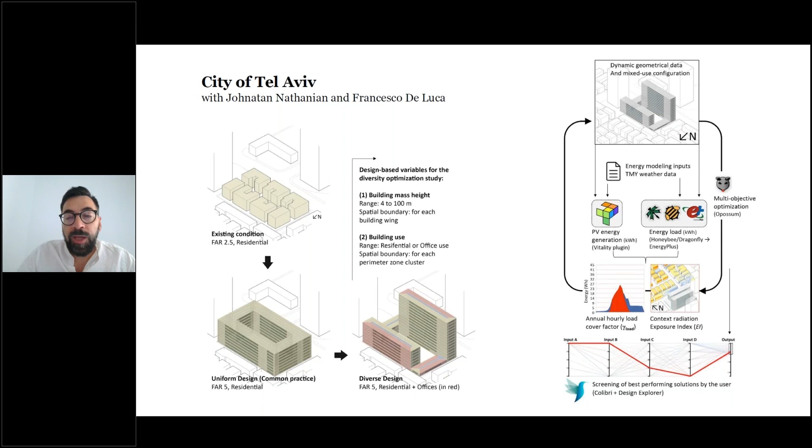The second work is developed with Professor Johnatan Nathanian and Professor Francesco De Luca, respectively from Technion University and from Tallinn University. We have several collaborations ongoing. And this work, led by Jonathan, tries to understand how urban morphology can sustain this layer we just mentioned. So if we look at the conventional way of building, probably we go for a catalog of solutions that are more or less belonging to a local type of vocabulary.

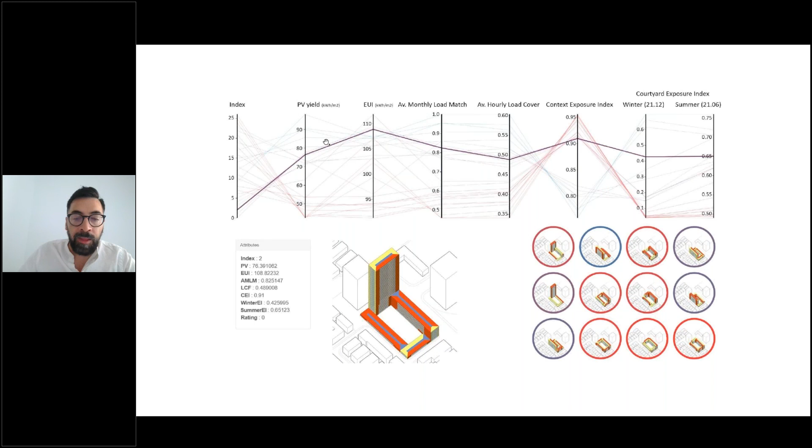But we can extend the form making, including other parameters. For instance, how can we create already self-sufficient forms, perhaps those inspired from biology? How can we do multi-performance optimization, where the parameter is not only energy, but also qualitative factors, for instance related to solar exposure, or why not by extending the chart elements such as photosynthetic activation. And this may lead to a new type of construction. And it's very interesting then to relate to what was already built.

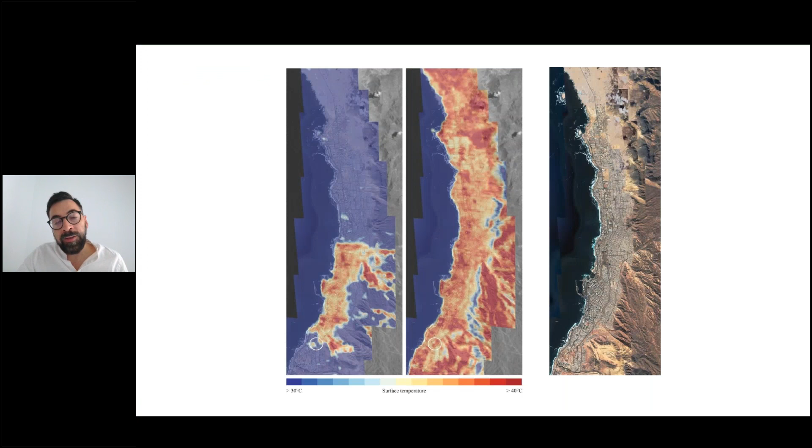Other work done with my Danish academic affiliation was done in Chile, in the city of Atacama, very much threatened by climate change, where the idea of this work, conducted in strict collaboration and with the help of a student that I would like to mention, Amy Desert, was to track and sensorize a series of buildings as well as the outdoor environment, as a way to have a full year of what we call climatic happenings within the city.

These charts are then used as something that is going to impact and inform the design of the city, with an approach which is not related to mitigation and modulation of temperature that would imply more use of energy, but the concept of planning is here based on the acceptance of the change and the understanding of what bio layer would fit within the picture, what type of vegetation, what type of local animal, also considering the proximity of the desert, would be adaptable to the city. As well, when it comes to human activity, the idea is not anymore to force and to have environments that are cooled, but to try to fit the program to the different thermal happenings that you have on the site.

And this also is quite interesting when we insert, for instance, future climate projections and try to understand with thermofluidodynamics what are the different conditions that you have and how this can be influenced by the making of new types of forms. Therefore, you create a series of atmospheres that can host life in different types of forms.

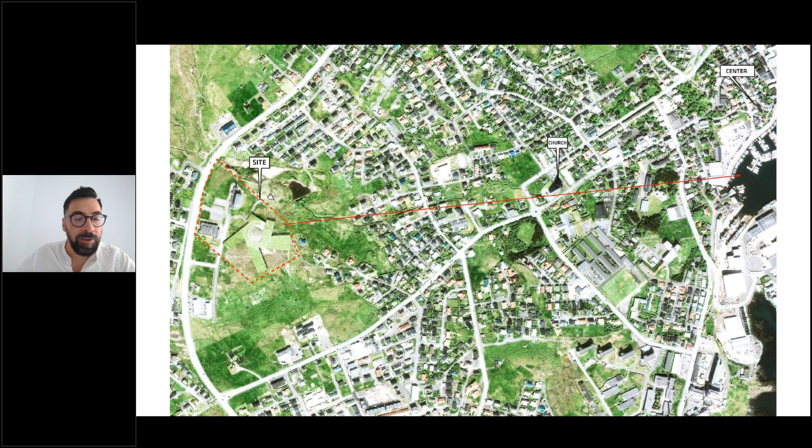You can see here how the shape on the left is almost coming from a wind rose. And relating to the title of the workshop, which is about climate change, differentials of temperature between sea and earth are definitely changing due to climate change. So traditional patterns that are established and even used by navigators at sea are strongly affected by climate change, and it's very important to have buildings that offer an answer to this type of variability. So this is the concept implemented in the early discussion we've had for this type of project.

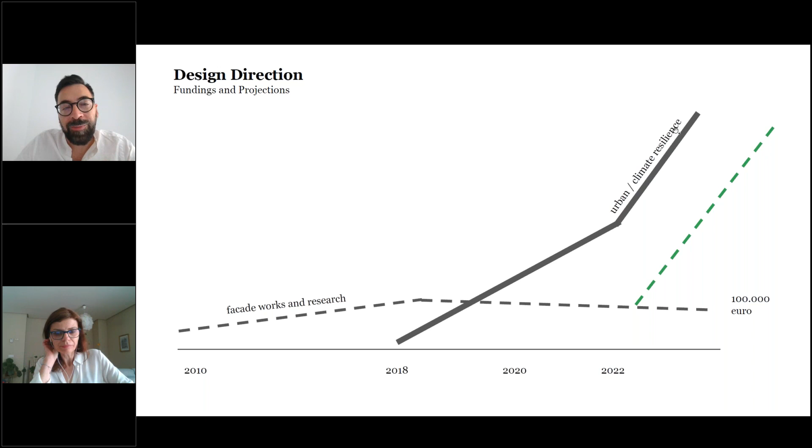So the envelopes, as expressed in this chart, regain a certain interest, and also it would be very interesting to think, like we discussed yesterday, of envelopes that are able to become intelligent mediators between the outdoor and the indoor.

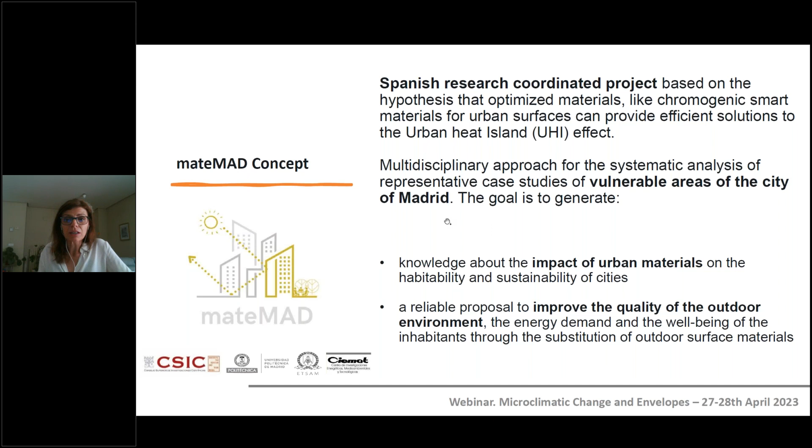The activity that we develop is mostly related to energy and the built environment. And in this line, I'm leading this project called Urban therCOM, that is part of the big coordinated project MATEMAD. The project is really related to all the speeches that we had yesterday and today, because it starts with the hypothesis that the use of optimized materials can improve or mitigate the urban heat island effect in the city. So the project is divided in three sub-projects.

The first one is led by Instituto Eduardo Torroja, from the National Research Council, and they are dealing with the characterization of urban materials. So all these topics are related, for example, to the speeches we had today, for example with Ioannis, or the speeches we had yesterday also. And sub-project 2 is led by the Faculty of Architecture of the Polytechnical University of Madrid, and they deal with monitoring of the environmental parameters. We have already spoken today and yesterday on the topic of dealing with data, having good real data, and being able to calibrate our models.

That is, for example, the aim of the third sub-project, that is mine, that's Urban ThERCOM, that is most related with the modeling outdoor. So the project starts with the assessment of the vulnerability in the city of Madrid. So this is also another aspect that is related with the topic of climate change, because we need to have relation with the inhabitants of the cities.

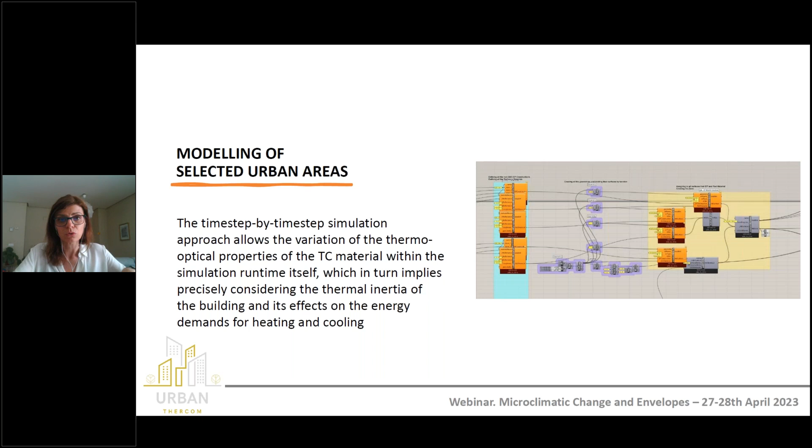And for the part of the simulation, we have developed a strategy that is a Grasshopper-based digital workflow. Most of the presentations that we had yesterday and today are also based on this kind of strategy, because it gives the possibility to simulate the different physical domains in the same workflow. At the moment, we had developed a really little part of the simulation workflow. We have developed simulation for the thermochromic coating in a single test room, basically here in Madrid.

And for the future, I am really happy to have met all of you here, because you are very inspiring for me and for the next steps of this project, in which we have to put all together the environmental part, the energy part and the envelope characterization of our building. So that is all. Just to close, I'm really glad to have met all the friends and colleagues, to meet new ones, and I hope we have the possibility to collaborate in the future on these topics.

So now we open the session for the conclusion discussion. All the panelists can switch on the camera and can participate in this part. So Emanuele, do you want to add something else?

Sure. I guess it's quite late. Yeah. We are all a bit hungry. We comply with Spanish time.

This has been two very intense days. I would like to do a small wrap-up, which is very much needed after so much information, and then ask the panel if they have any considerations or points. I would like to stress how important it was to see different techniques for modeling the microclimatic changes. It becomes very important to use more accurate types of information when it comes to climate change.